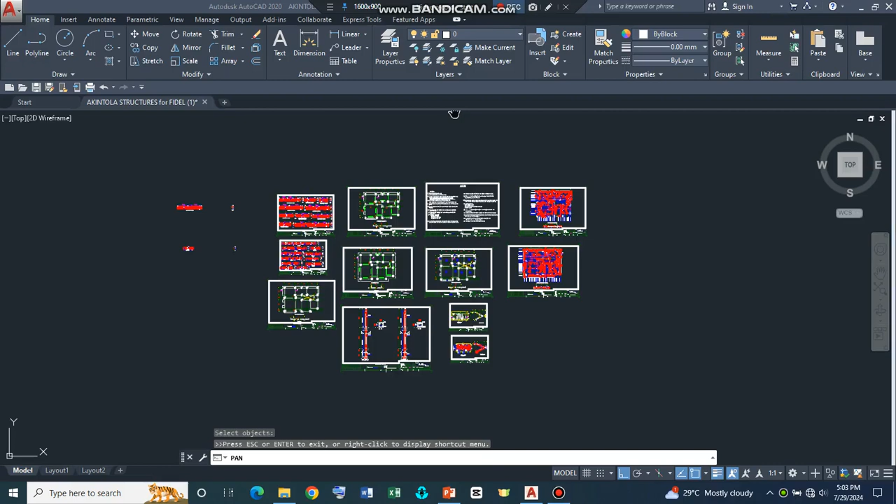In today's video, we shall be looking at this array of drawings which was carried out for a client. So the architectural drawings had been done by an architect, while the structural engineer is supposed to carry out the analysis and design of the structural elements.

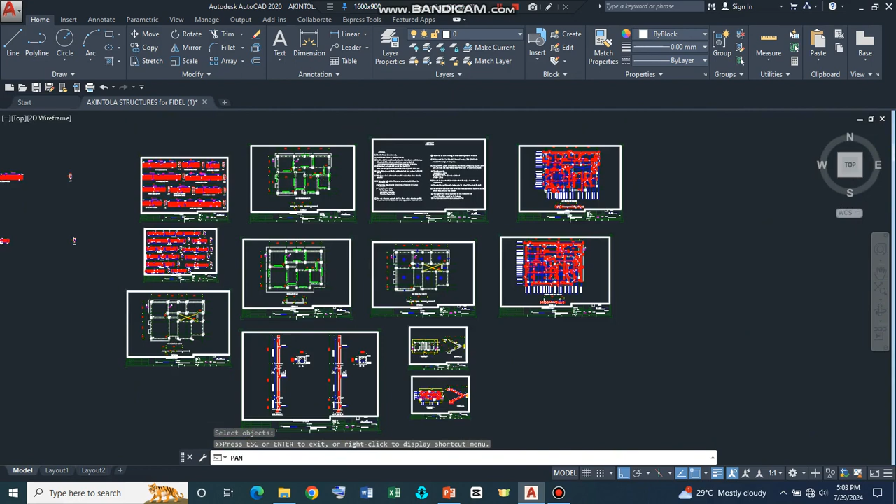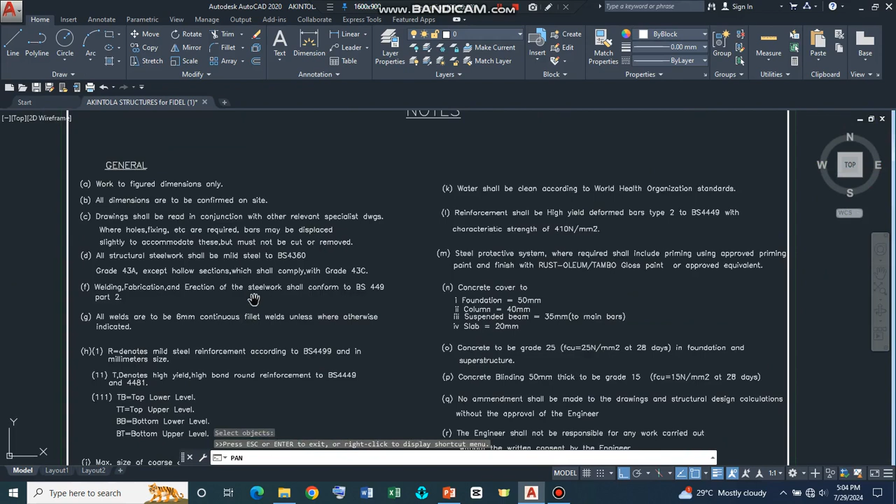So from what we can see, let me start with the notes. So we have some specifications that have been given for this drawing. All these are meant to act as a guide for whoever is going to supervise the job on site. So we have instructions like the dimensions that are to be confirmed on site. Structural steelwork shall be mild steel according to BS 4360.

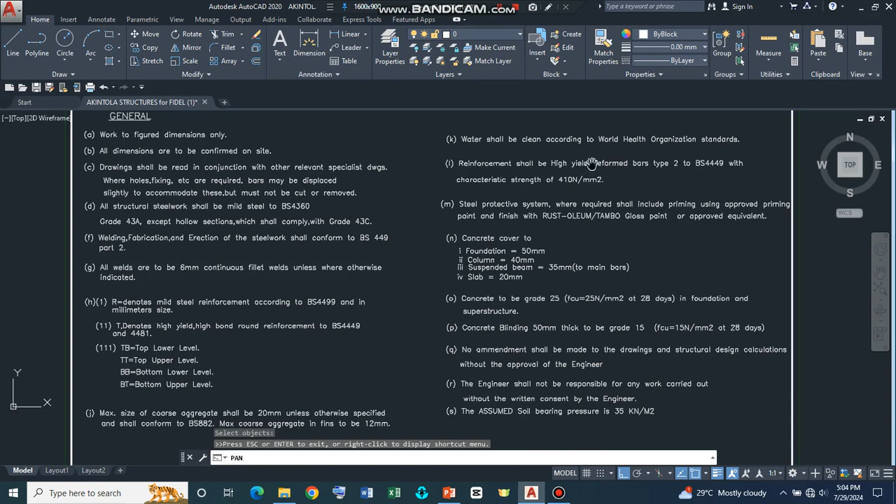And then the notes concerning welding, concerning concrete grade, even up to the soil bearing pressure, which was assumed to be 35 kilonewtons per meter square. Of course, that's a very low soil bearing pressure. And because it has a low soil bearing pressure, there was a need to start with a very good design for the foundation.

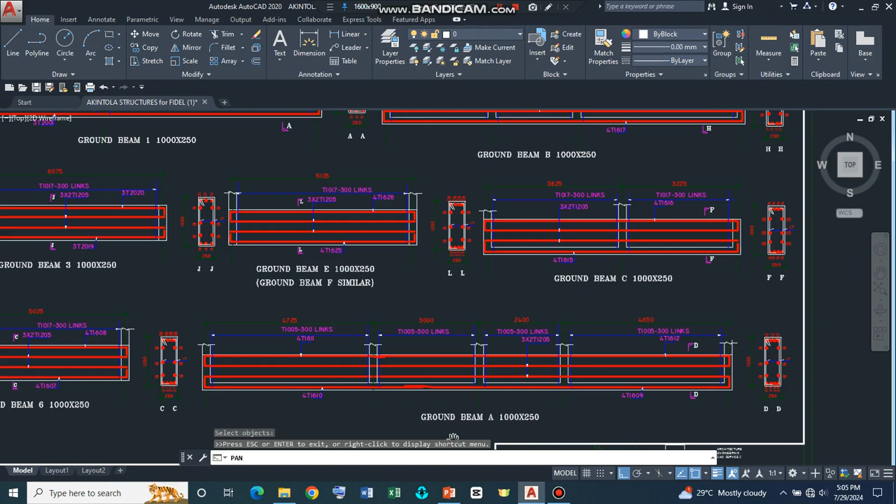So let's look at what we have here. What we can see here is the ground beam. Basically your raft foundation is just like a slab, but in this case it plays the role of a foundation. It's usually made up, depending on the design, of the beam and the slabs. So here we can see this is a ground beam. We have different beams as per the design that was carried out.

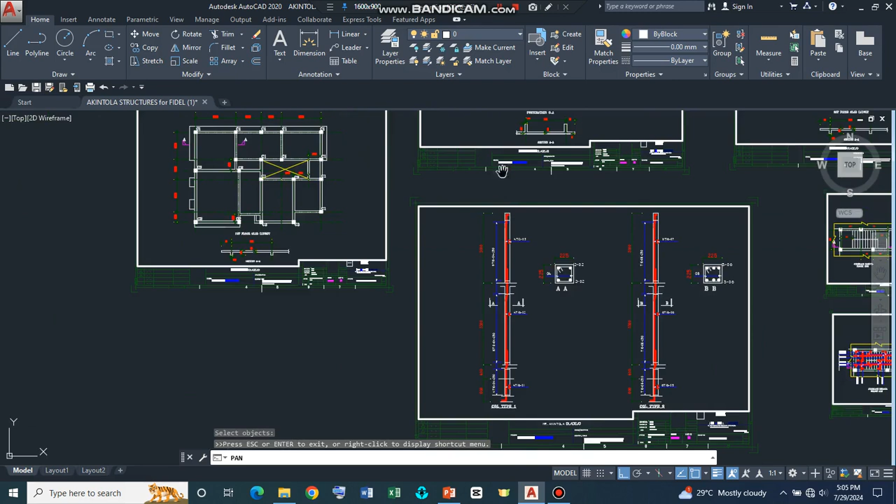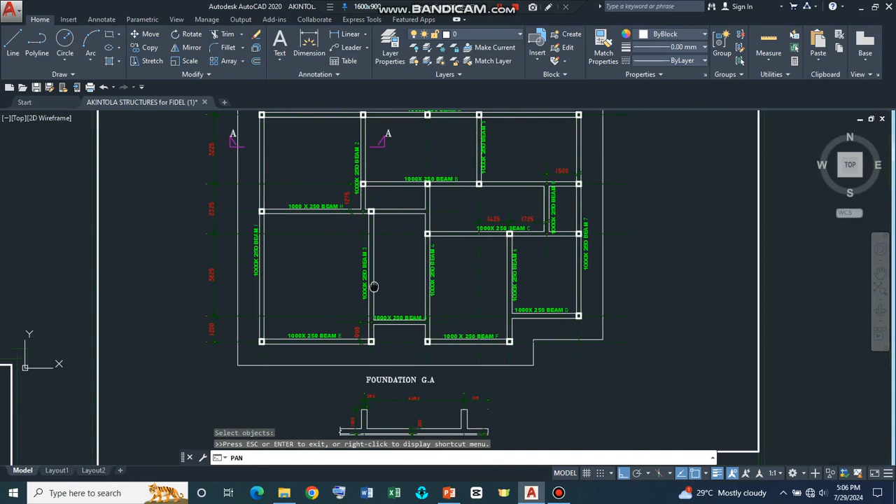If you look at what we have here, this is the first floor beam. Let's go and check. This should be the ground floor beam. So that's where we have our foundation. Our foundation is basically made up of a combination of beams and slabs. And if we look further, let's start with this one. So we have a ground floor slab. You can see that the skeletal features have already been laid out here, this one, foundation. And so there was a need to include where the reinforcements will be for the slab.

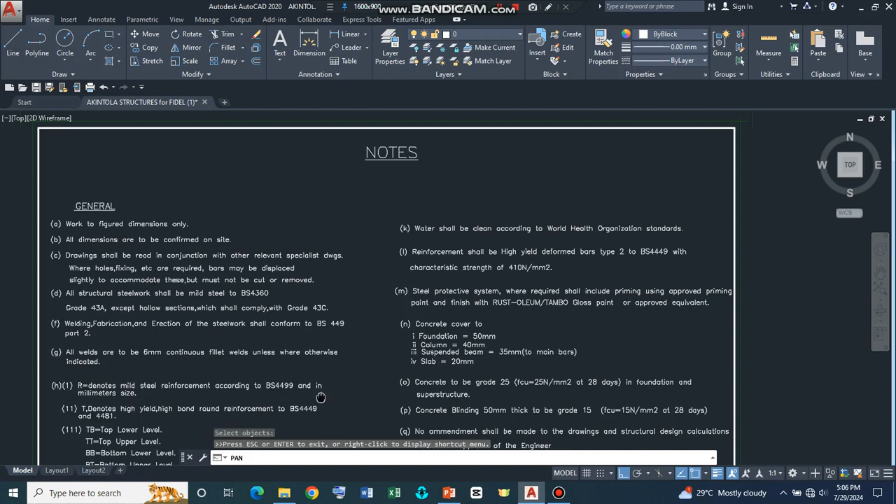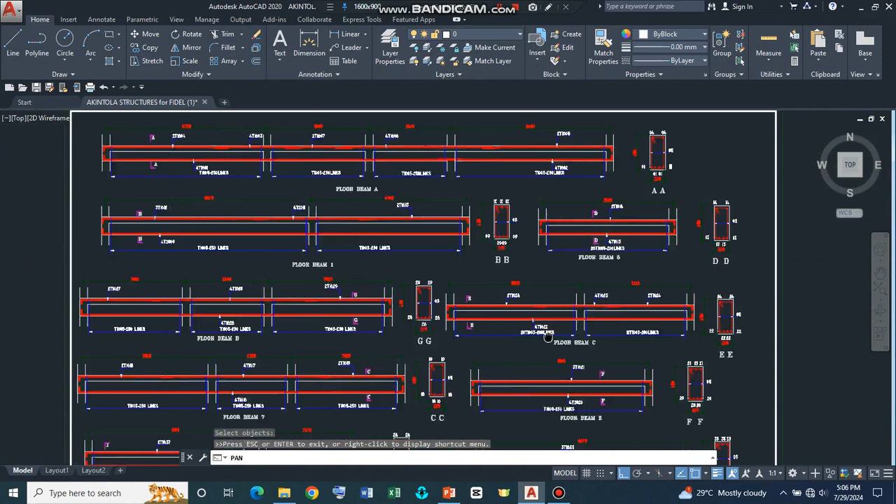So after that ground floor, we now have the first floor. So we have all the detailing displayed on this array of drawings. The same thing also applies to the beams. We have the first floor beams, then we have the ground beams. I've explained the ground beams earlier. So the question is, how can we draw all this? Let's look at the ground beams.

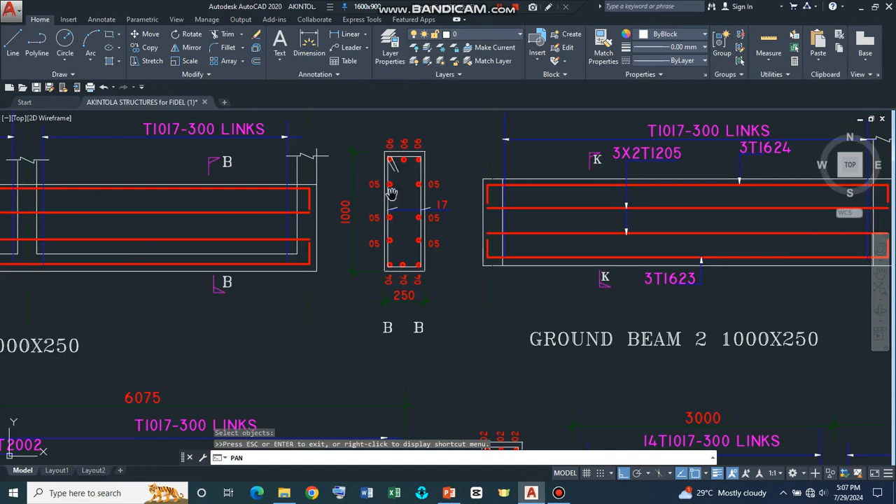Now, from what we can see here, the longitudinal section of the beam has been given, while the transverse section is here. We need to understand this drawing before we repeat it, because we are expected to have an understanding of this drawing and then be able to draw its section.

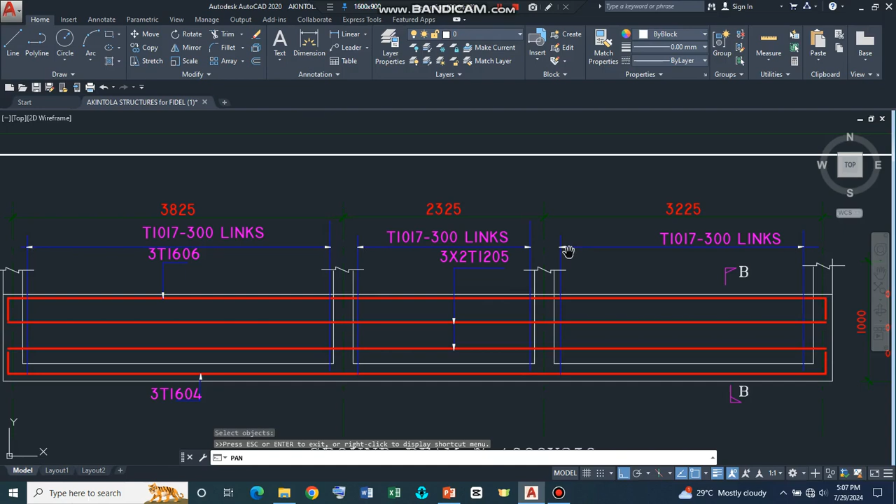So from what we can see, just like the normal beams, we have stirrups that will extend from this arrow point here up to this boundary here. The same thing applies to the boundary from the second span to this point, and then the third one spans from here to here. And already from what we know, what does T say? It's just for us to have a better understanding.

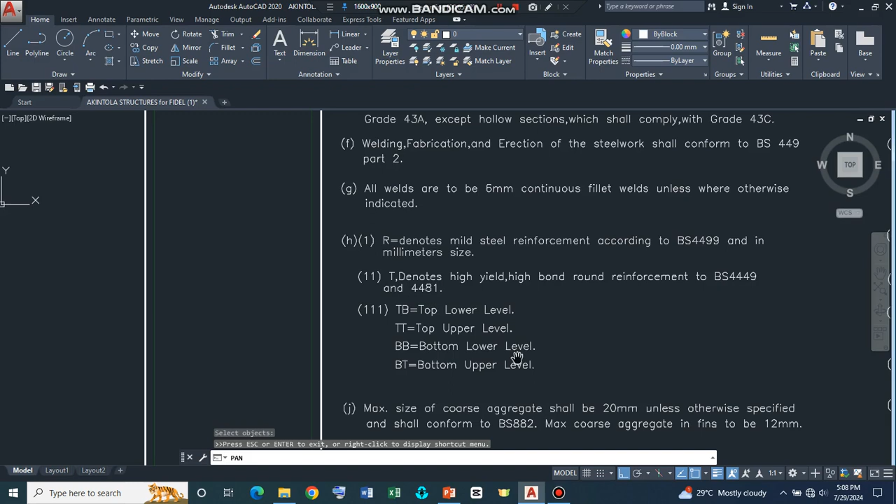Okay, so T denotes high yield, high bond round reinforcement as per BS 4449 and 4481. R denotes mild steel reinforcement as per BS 4499, and the millimeter size. All the other ones will come up when we are dealing with detailing: the top lower level, the top upper level, the bottom lower level, bottom upper level. So let's go back to what we're looking at here.

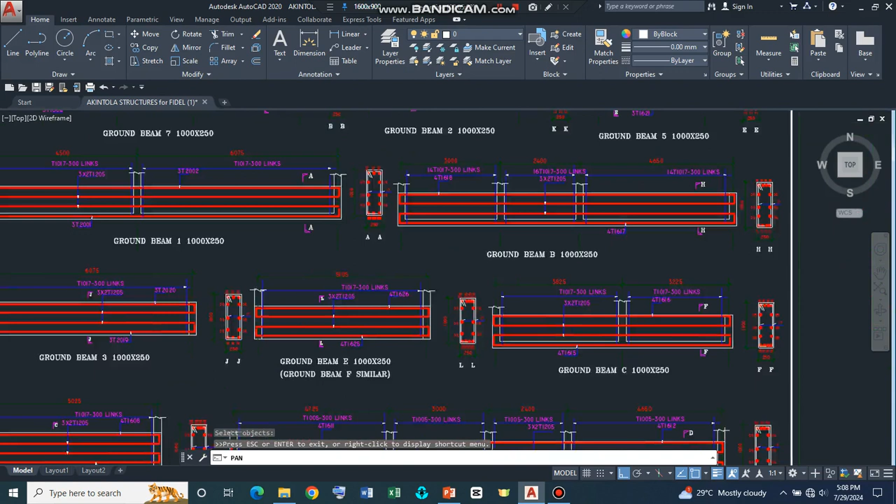So from this ground floor beam, let's look at this so that we can interpret it better. This one is similar to the other one. It means that from this point to this point, you have a total of 14 high yield stirrups. The diameter is 10 mm, while the bar mark has been given as 17. It has a spacing of 300 mm center to center.

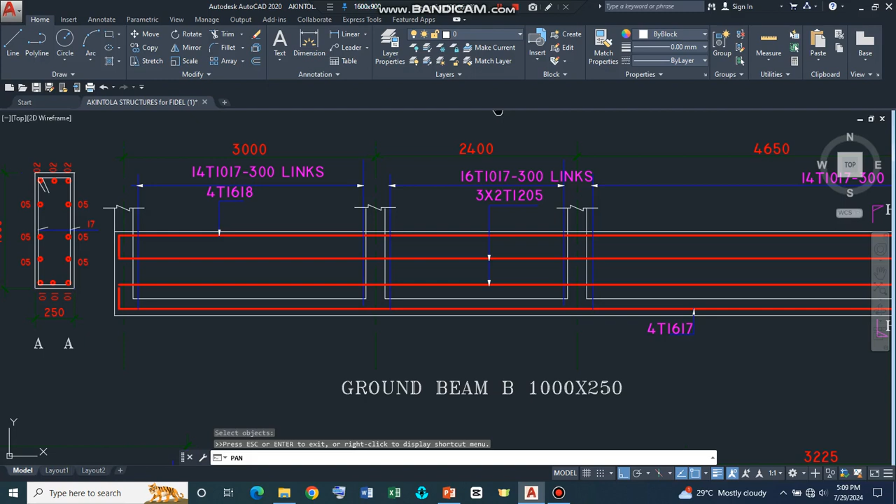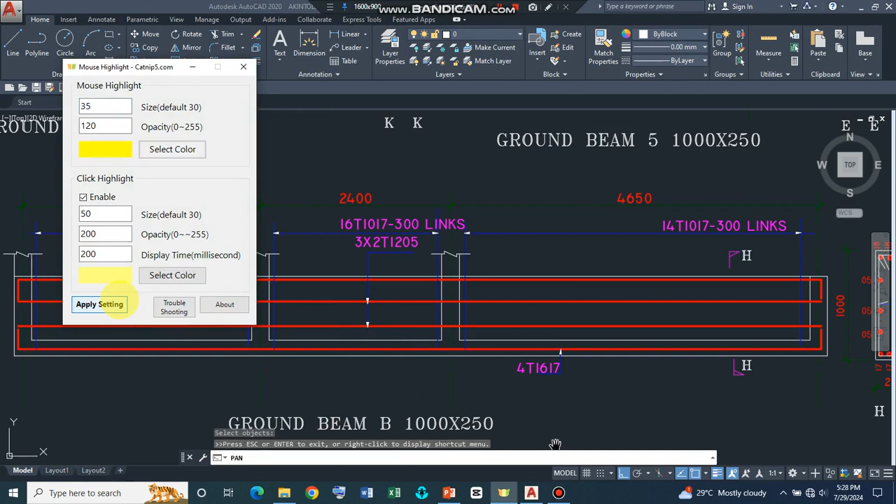So let's look at what we have here. You will see that this reinforcement, let me put this on. So what we have here is that this particular reinforcement has already been labeled as 4T1618, meaning that at the top bar here we have 4 reinforcement bars with 16 mm diameter, and the bar mark has been given as 18.

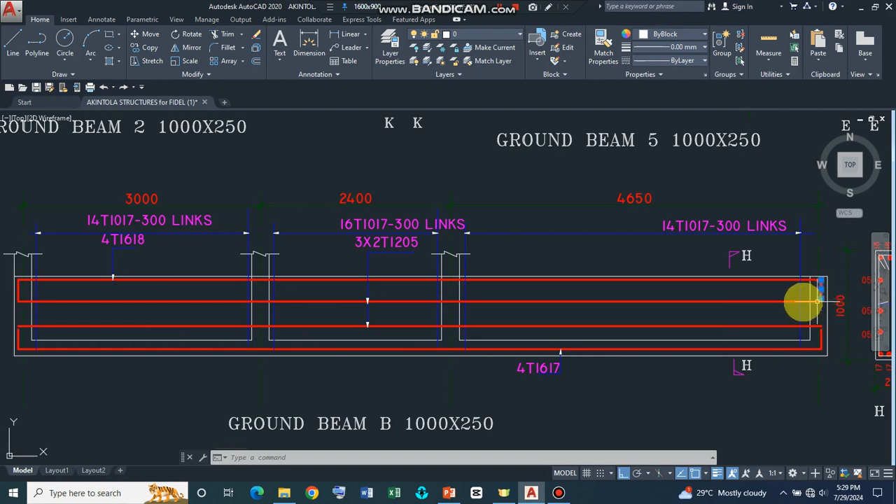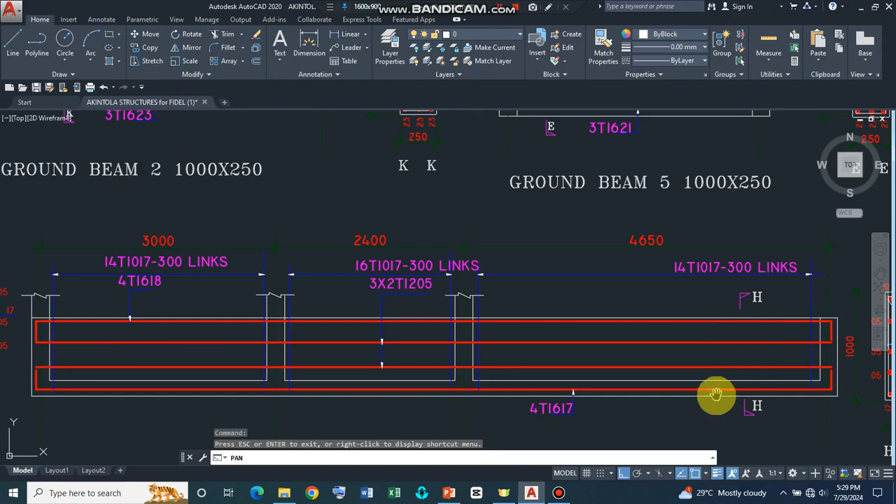Now, what does it mean? Let's shift the drawing this way. What we can see here, the top bars, remember, extend from this end with the bent up bar up to this end, and the section was taken at this point, HH. So the top bar will obviously appear like this, meaning that there are 4 numbers of 16 mm bars.

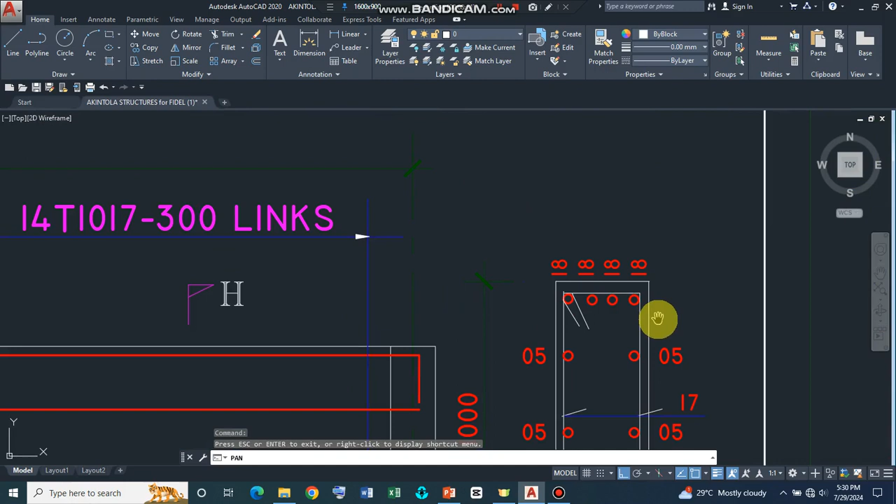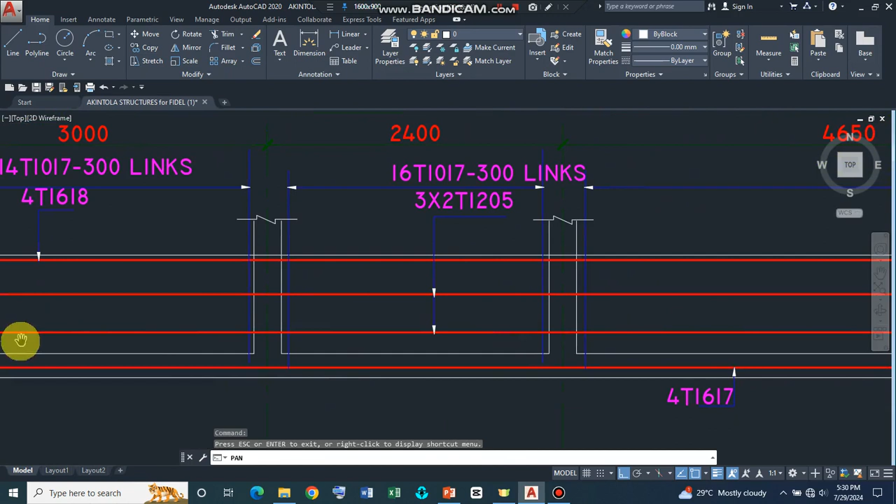And don't forget, the bar mark has been given as 18. Let's go back and confirm. The bar mark is 18, and the indicator here is that there are 4 numbers of 16 mm bars with the bar mark 18. Now, let's look at this again, because all the reinforcements extend from this end down to this end. So whatever information we can get from any of these other spans is valid for this span.

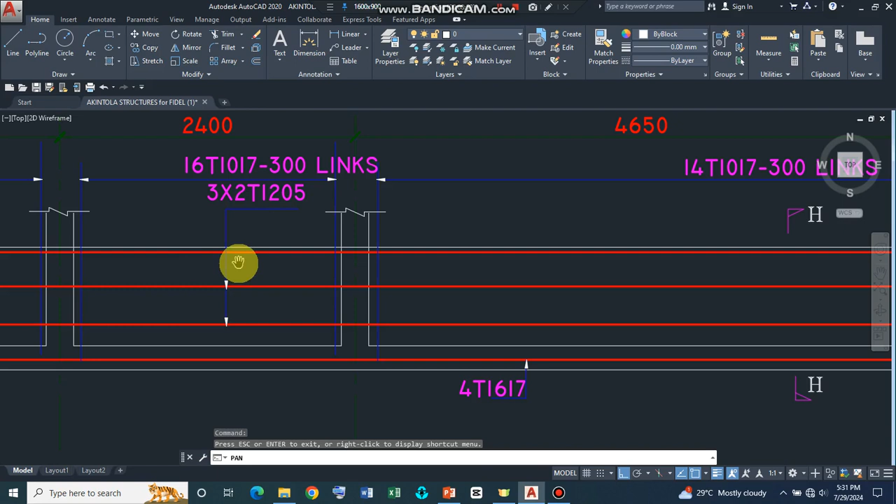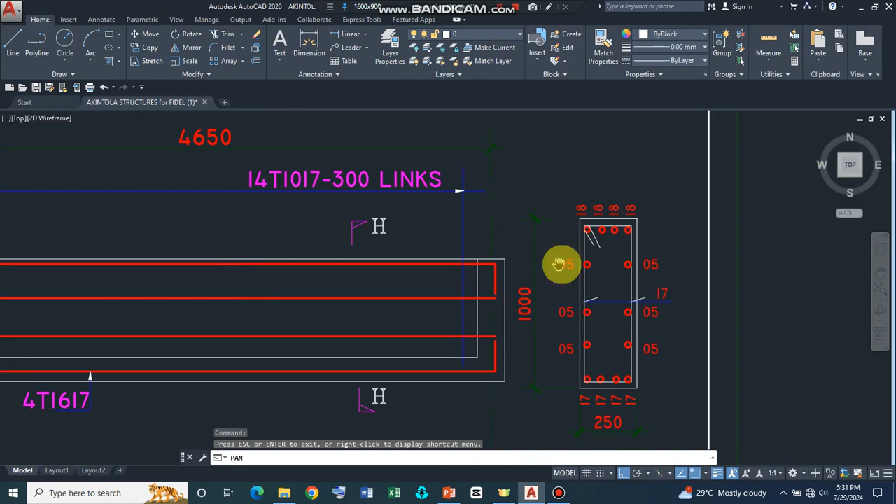So from the second span, we could see here that we have 3 times 2 T1205. What it means is that if you are looking at the beam from this section here, you are going to have 1, 2, 3 times 2, meaning that you have 6 of them. They should be at either edge of the boundary of the stirrups. The stirrups will be used to hold them up and position them in this kind of orientation.

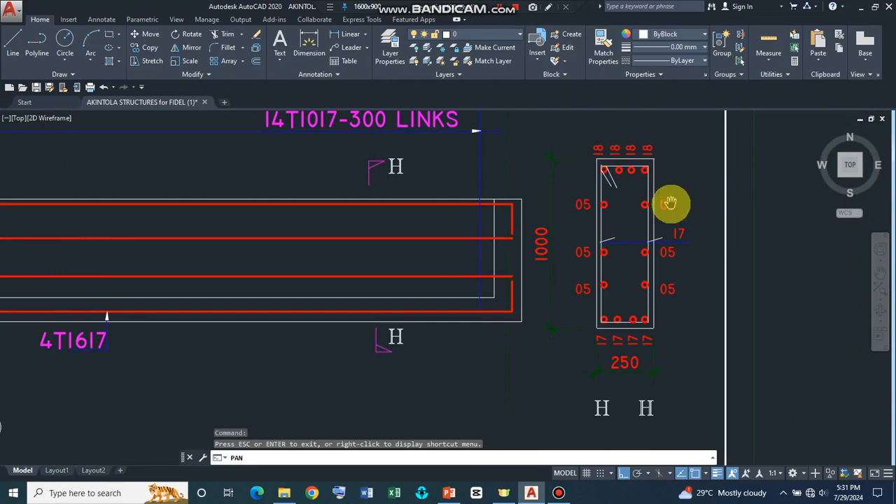And this is what you must take note of: though you have 2 lines here to represent the reinforcement, it means that between this point and this point there are 3 reinforcements on either side of the section. So we have 1, 2, 3 on this part of the section, and then 1, 2, 3. That is the explanation for that. Now this last point, the lower bars, what we have here is 4T16, and then it has a bar number of